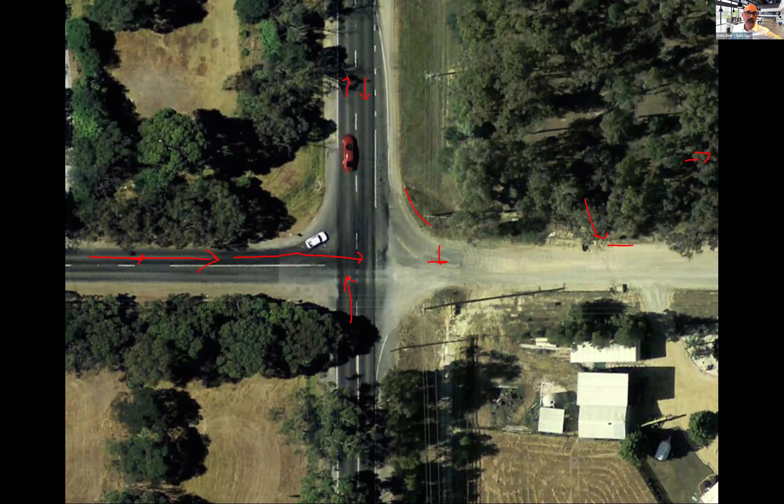So now, okay, let's just play this out a little bit more. What do you think you could have recommended as a road safety auditor to lessen this risk? What are some of the recommendations that you could make?

Staggering the intersection, prize for Chris Saunders there. Some warning signs, Amar, prize there. We had some more on warning signs, some more staggering the approach. Anthony, change the intersection form altogether, roundabout. So prize there for Anthony.

Now, 10 years later, so this is 10 years old, that is a roundabout. It cost a lot of our community their lives and serious injuries. Finally got to a roundabout, and there hasn't been any fatalities or serious injuries since.

We've got Rick with a hand up, I think. We'll see if Rick wants to actually chat to us, or that was maybe an accidental hand up.

I'm just looking. So audible pavement markings is a good one as well. So rumble strips across the road, advanced warning, different pavement markings, putting a median in. Tolini, I hope I pronounced that right. I think you're talking about a splitter island, and I really like splitter islands. So there's my little splitter island and my splitter island.

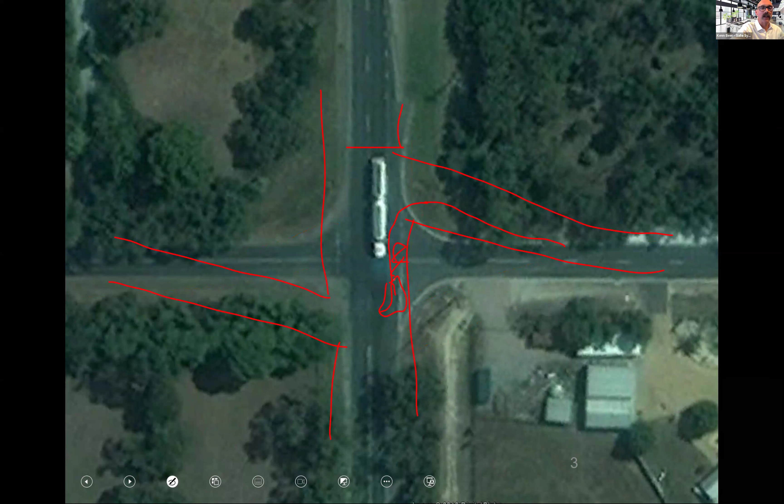And even if you give them a right turn bay, those times when there's a few of them, they start queuing in, and you just get this mess going on here. All right, and you get the same out of this side. So what you actually want to do, you stagger it the other way, so it's a distinct turn across traffic.

Now, those are all sort of supporting treatments, and anything associated with advanced warning up here, rumble strips to alert and everything like that, those are just supporting treatments, because we know we've still got high-speed vehicles here. We've given more warning. Vehicles will come in here, hopefully be better alert that there's an intersection, you've got to give way. But if mistakes still happen, for one reason or another, either overshoot or restart, we have this high-speed right-angle crash still there.

So this is where we go back to, I think it was Anthony who said that, you could look at changing the whole intersection form. A roundabout at this location would virtually eliminate death and serious injury for passenger vehicles. Now, this is not a highly pedestrianized area or bikes or everything like that, but certainly passenger vehicles, because as they approach, they would slow down.

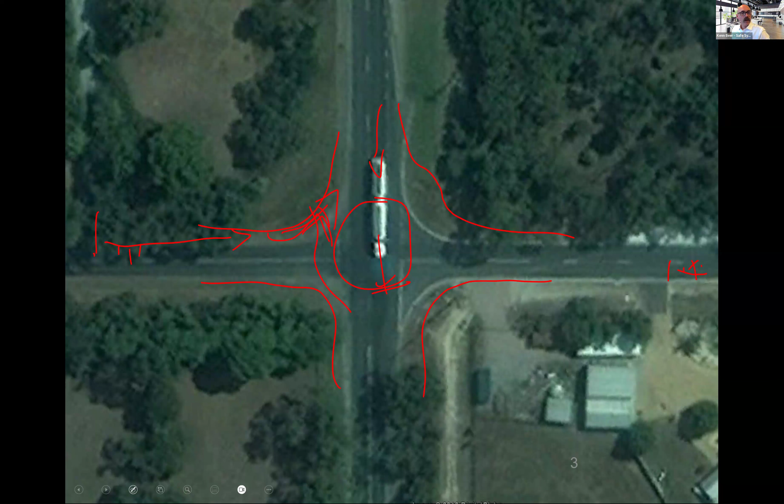They're very aware there's an intersection there. If they enter the intersection and then there's a crash, the angle of crash is just wonderful. Like, those vehicles sort of bounce off each other. Roundabouts, like, up in the 85 to 90% crash reduction factor for passenger vehicles. So there you go. A little example there.

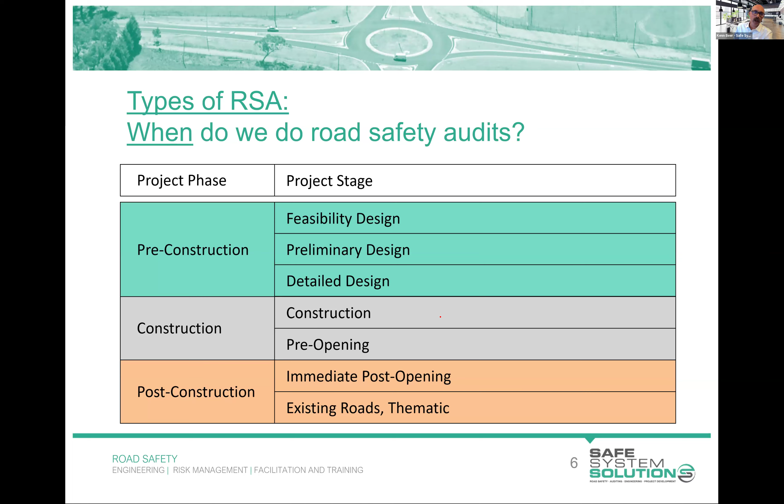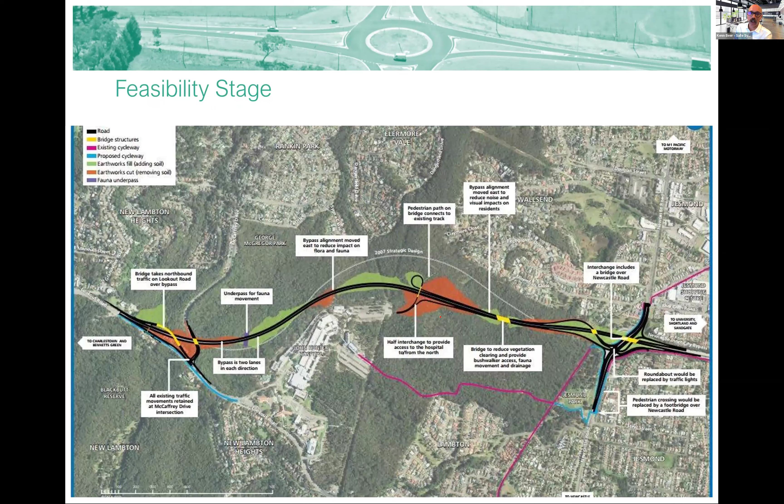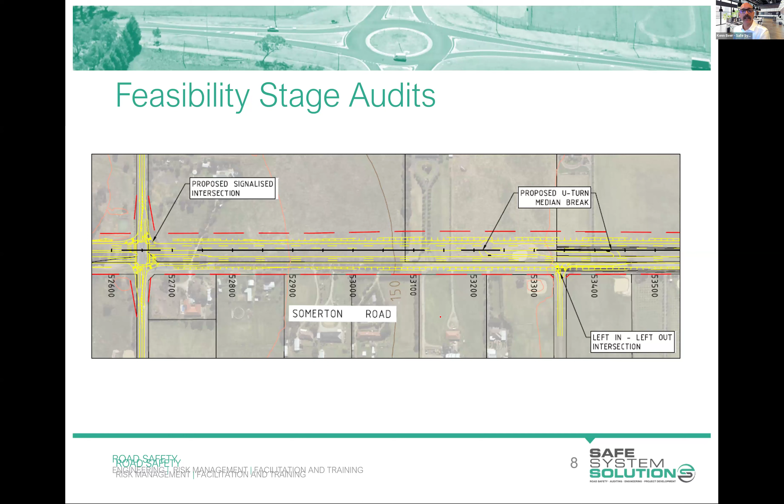So we talked about these big picture planning style road safety audits. The advantage of auditing at this stage is they're still very willing to make fundamental changes to the project, trying to ensure that the best safety outcome is achieved and all their other objectives as well. So there's real scope for getting significant change to happen. As you get more meat on the bone of the design and the project progresses, it starts to get a little harder to make change. You're still certainly able to make changes at these sort of stages.

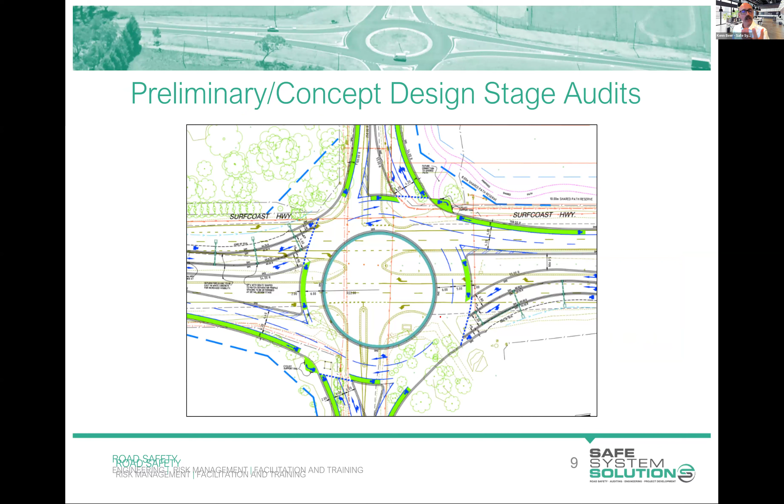And here they've probably arrived at what they're generally thinking as intersection form, roundabout. And then they're going to start to hone in on how do we make this the safest roundabout possible. You might still be in there to question the actual fundamental forms of the intersection and the project. But certainly as you get to detailed design, it's very, very hard to ever get fundamental changes to the project. Not to say that the road safety audit doesn't provide huge, important value, but it's really into the details of the project.

Have we got the geometric layout right? Have we got the super elevation right? Are we providing sight lines to the pavement at intersections, so forward sight distance, and is this all going to drain properly? Because that can be linked to road safety if we're going to get pooling of water on the carriageway.

Our job as road safety auditors is not to undertake a whole drainage assessment of the thing. But if you're concerned, "I don't think that'll drain that well and it'll pool on the carriageway," that's something you would flag. Technically, if you went, "All of the water now is going to go into that house on the side, that's going to flood that house," it's technically not our concern as road safety auditors.

Now, from a practical perspective, I would probably just note that somewhere in the audit and just say, hey, by the way, to note, this is going to have some serious flooding effects to that property, or is likely to. You should check that. But it's not a distinct road safety audit finding because it's not about death or serious injury or other injuries from a road collision, which is what we are there to focus on.

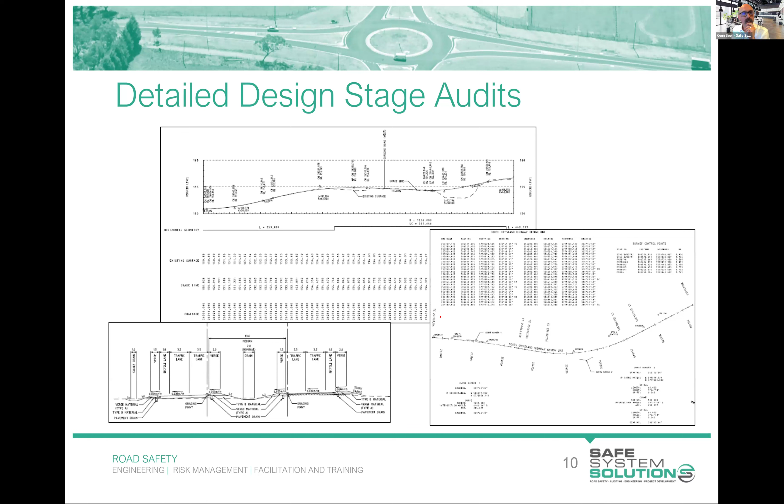Often we find that you've got that detailed design expert in the team, and then you've got somebody who's not, but asks some really logical, great questions. Asks, pedestrians at this point, they're not going to stop and wait. Or pedestrians over here, they're going to want to just go there. That's where they want to go. So is there a possibility of providing pedestrian crossings on that side as well?

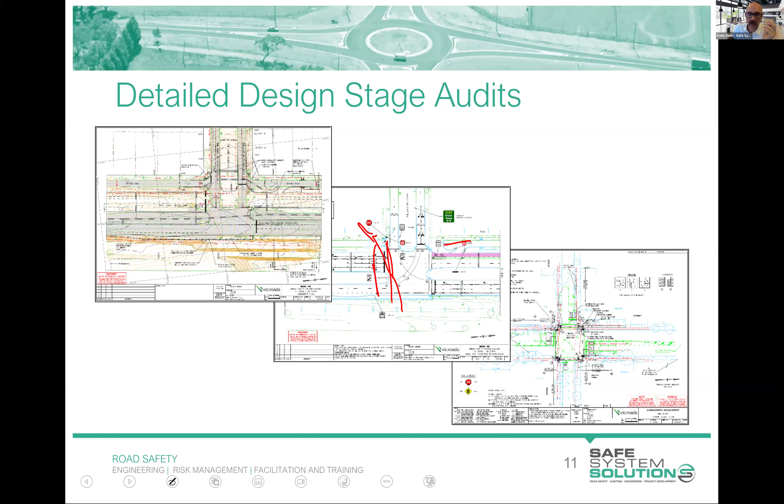Those sorts of questions, like how are road users actually going to use this? What are they going to perceive? What could be confused? And combining that with the understanding of the geometric layout and how all the signal phasing will work and everything like that can be quite a nice combination.

Just one example of the specific detail you start picking up in these detailed design road safety audits. I picked just one out of thousands I could have picked, but I like this one because I had a few good photos. Drivable culvert end walls. Now we've got an end wall, or a head wall, as it's called, which is where you're taking the water under a driveway, an access point, or crossover. The old practice would be to just put that head wall, and we saw lots of death and serious injuries involving vehicles leaving the road, abruptly stopping when they hit that.

And so there was the development of what we call drivable culvert end walls, which, okay, don't stop the vehicle in a nice controlled manner, but at least make sure that the vehicle's not having that abrupt stop at that location. So a vehicle will go up on that. Now, we do drain our water sometimes across the road. And so this time we've got it going across. So this is a drivable culvert end wall.

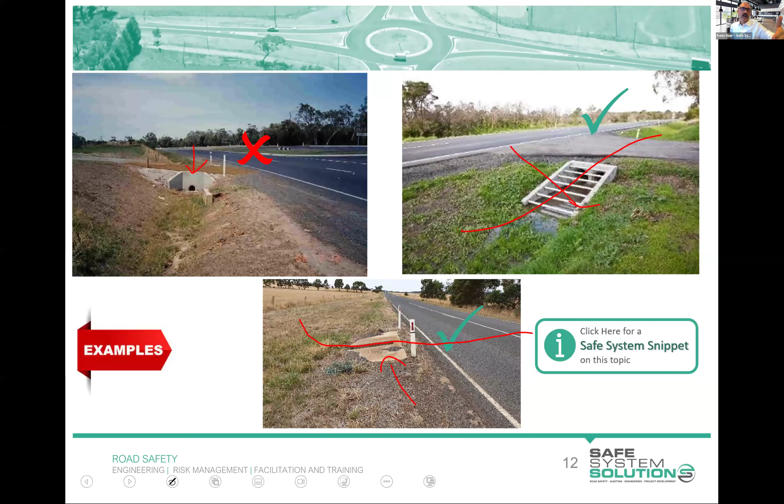But there's two types of drivable culvert end wall: a type 1 and a type 2. Ensuring that type 1s and type 2s are correctly specified in the design is important, because if you put this one running parallel, there's a possibility of dropping in it. I think it'll actually work out generally okay, although some of these have much wider gaps, and vice versa. You can see the precision of detail.

That one we see pop up quite a bit, because often people just copy, or they just talk about type 1. Sometimes they don't even know there's a type 2. And so it's type 1, type 1, type 1. And it just happens that actually that one goes across the road and we need the type 2.

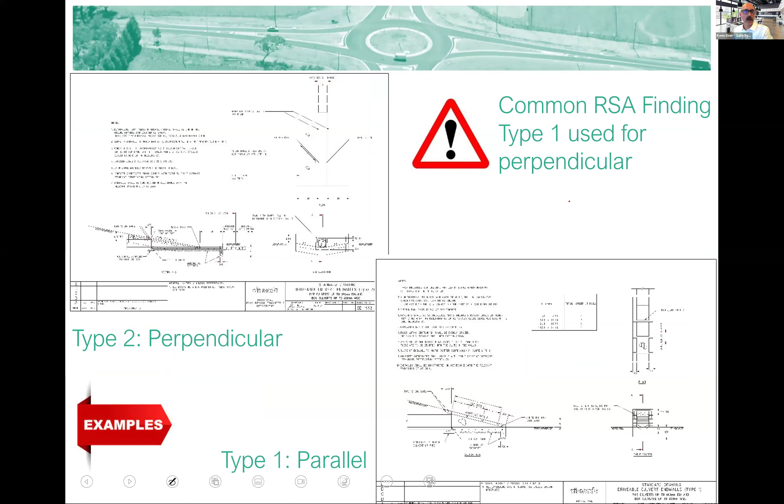And we talked about our construction sites, traffic management, thinking not just about conformance with the code - are the bollard spacings correct, is the taper long enough? All important stuff. But think bigger, think wider, think road users - how are they going to move around here? What's the tie-in, what's the lead-in?

What happens when the traffic banks up? How are bikes going to get through here? How are pedestrians going to get through here? What happens when they close this for a long time, or a couple of minutes, and traffic really banks up? Where does that go? Are people just going to avoid this, divert down other roads that are more dangerous?

You sometimes do this on really big schemes too, like major freeway works, and you're thinking about all sorts of challenges, and also how does it interact with electronic lane use management systems - which one should be shut down, where and how, and what are the configurations of that? So there's a bit of intense thinking to be done with it.

But one thing I always flag is that if you're doing a small job, like some patching, using a standard roadworks layout, I'd say it's overkill to do a full-blown road safety audit. That's something the surveillance officer, the project engineer, and the traffic management company combined should have enough to ensure that's done safely. Should it be great if we had road safety audits on all of them? But that's just a huge effort for a very small project.

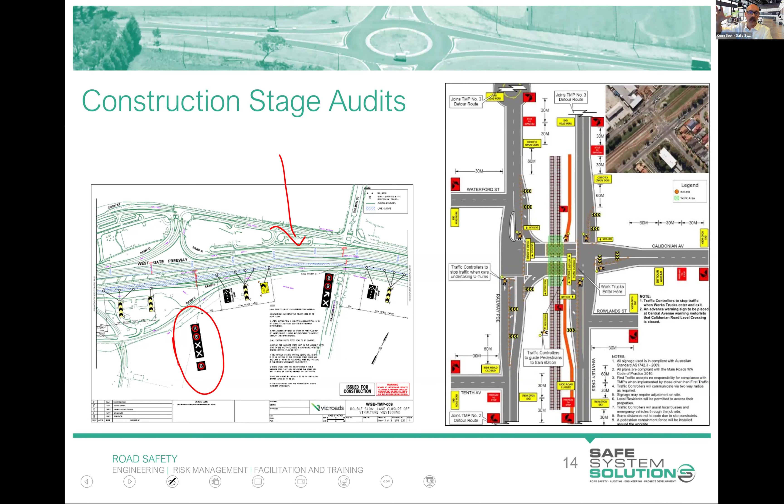And we talked about pre-opening, where you're going and doing that last minute check. And I showed this fun little one - one of my colleagues was doing the...

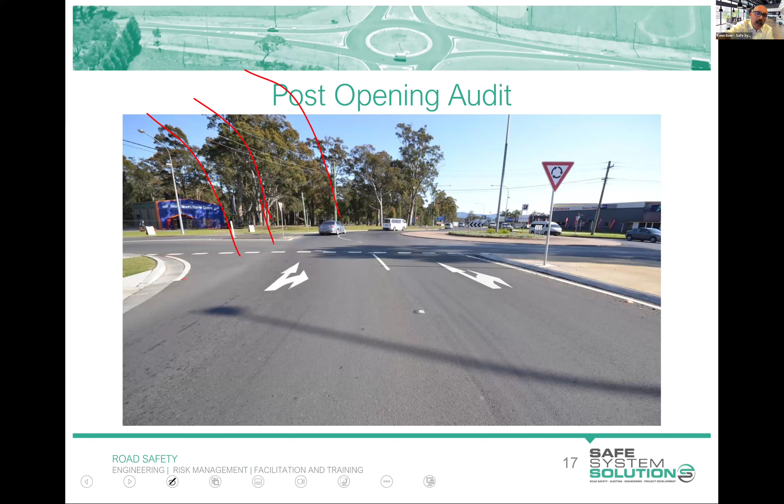Pre-opening road safety audit with a team at the Peninsula Link just before they were opening up, and they had marked this essentially not on a roundabout but on the exit. There's a dual exit, two lanes exiting, and they had marked one to go like that, which was correct, but they also marked the one next to it to go the same way. They just used the same marking, which obviously then causes that same issue.

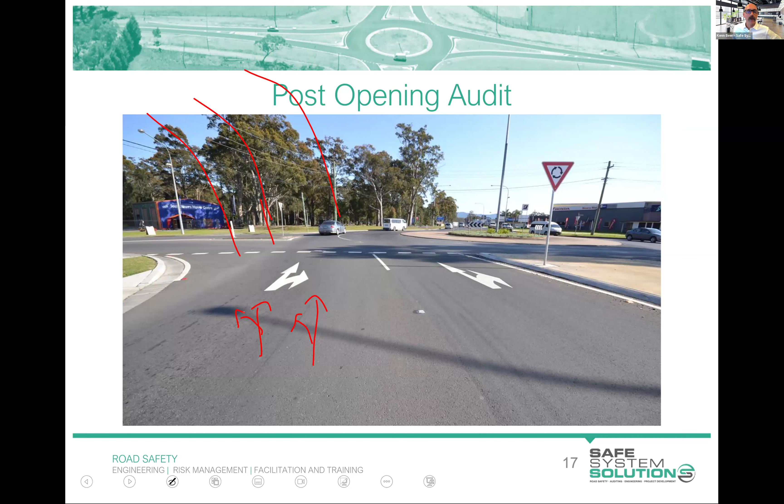So you've never seen line markers work quicker in their life to get that fixed. The minister was coming the next day to cut the ribbon, so everything was happening. But those things happen, even on a multi-billion-dollar or billion-dollar project. And existing conditions audits...

Before I finish on existing conditions audits, I'm going to give you a little warning. If you're a local government or road authority representative and you think, well, these audits sound really good, they've got a great benefit cost ratio, we should be looking at doing audits more - I just warn you, don't get caught into the trap of saying we will undertake road safety audits on all of our roads over the next 5 years.

All you will get is thousands and thousands of issues. There's some merit to that, but you'll never be able to afford to work your way through all of that. Instead, use a way to filter that down to some really key roads that you've got concerns with, then deploy the road safety auditors to give you details and ideas.

One other place I really like an existing conditions audit - I used to use this when I was managing different areas at VicRoads - was where you had stakeholders who were really irate about a safety issue, and there was disagreement between the road authority and the stakeholders. Either they were determined this was the most dangerous location ever, and we thought, well, actually it's not, we've got other priorities and we think it's not as bad, or vice versa.

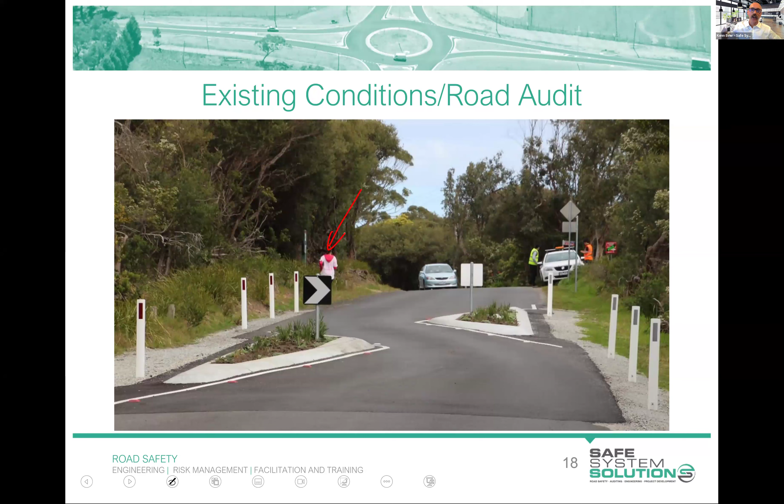This was a local government who installed these one-way slow points, and the community was jumping up and down saying this is the most dangerous thing - we don't know who's meant to go first. But that's the whole purpose of a one-way slow point: only one car can fit through, forcing them to slow down and work it out. I was on a team that looked at it, and we didn't find any high risk issues. We were more concerned with things like pedestrians along the road, and at night we didn't think it was quite lit up enough.

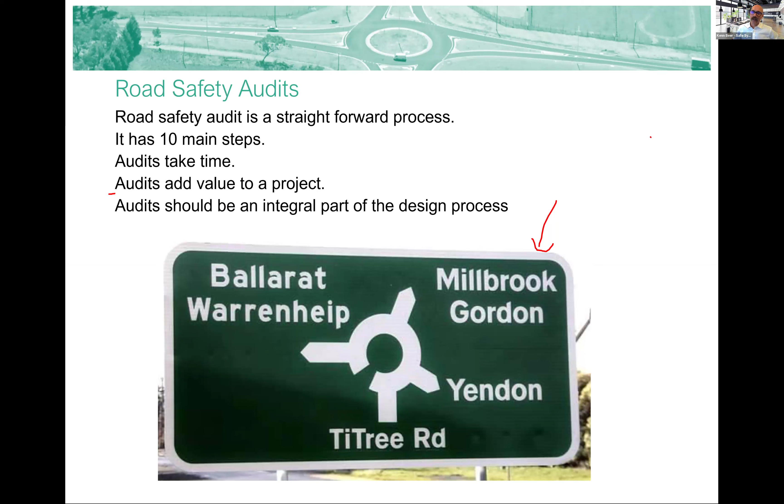Ooh, we had some interesting comments here, didn't we? It's in Victoria - well, that's true. Wrong way around the roundabout. Mason has come through, I like that. And Anthony's clarifying exactly why that is. Well, I'll come back to that, and Mason gets a prize. But let's come back to that - I promise I will come back to that comment from Mason. Let me go through the 10 steps first, and then we'll get back to that.

So the first thing is that the audit team needs to be selected, and that is the responsibility of what I'm going to call a client. In the Austroads guide, the most recent one, it was referred to as a project sponsor, because that gives a better definition of who actually holds the responsibility for the selection of the road safety audit. What I mean by that is, if a developer is coming to do work and they have to access onto the arterial road network, the client - the actual engagement of the audit team - is most likely done by the developer.

That's because the road authority, who is actually the project sponsor or end client, has delegated that authority to the developer through the planning process. So project sponsor is the term often used, but the ultimate responsibility for selecting the audit team lies with whoever will manage the asset after it's built and handed over to the long-term asset manager. That's usually local government, the state road authority, or territory road authority.

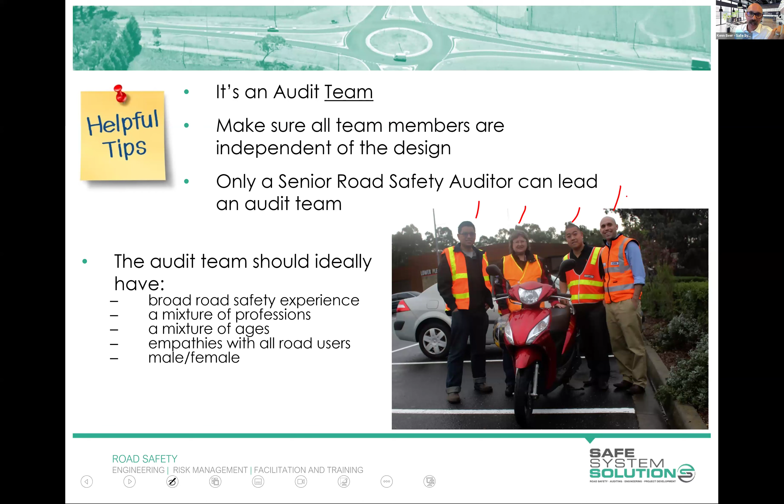Here's an audit team I put together - it's actually for a motorcycle specific audit. Me, Michael, Johan - we're all about the same age, male, engineers, worked in the road authority together. We kind of see things about the same, we're not really providing any unique ideas there. So we asked Wendy to come along as our rider with a different set of eyes, not an engineer, older than us, female perspective - just injected different things in there, which sometimes we scratched our head at, but at least we were then thinking about those, weren't we?

So you get all the background information. I talked about the commencement meeting, looking at the documents, and then you get out there and you undertake the inspections - you do a daytime and nighttime inspection.

Oh, it's Wally. Anybody who's not concentrating, wake up. Wally has arrived. Count your Wallies.

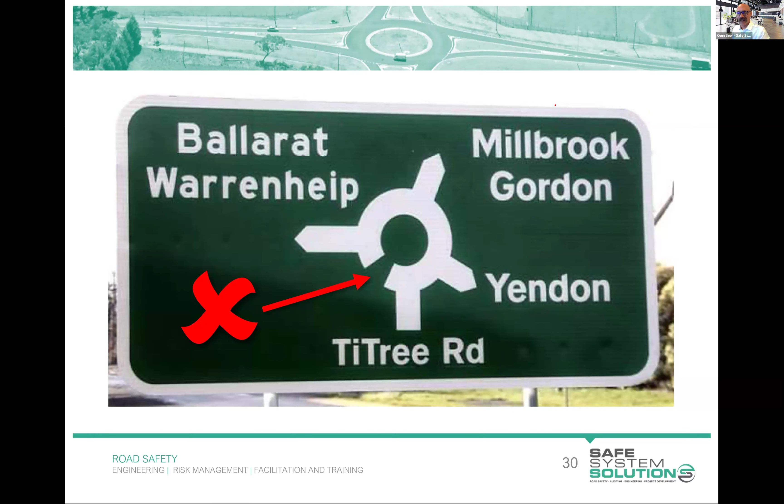So over to you. Where do you think - Rick's already answered my question, I didn't even ask it. Yeah, I like this group. Where do we think it's going to be a higher risk? And yes, tourist areas - prize to Rick for that. He's got that issue. Where are you based, Rick? Type that in.

Beauty of this stuff is that they get fixed. That's not an issue. Okay.

Let's go with what is in a road safety audit report. Well, we want to describe the project and the stage of audit you're doing, and list the information provided. Okay.

Important one here, and this will cover yourself if you ever find yourself in court as a road safety auditor, because what happens is you are given a certain set of information at a certain point in time in a project. You're given a design at this point in time, then you're going to make a whole lot of comments on it, recommendations, and it's going to evolve. They're going to change things, do this and that. If issues pop up along their design journey, they'll alter stuff, and something will be built. If something that's built has issues and a crash should happen, and there's legal issues and they decide to drag the audit team in, you really want to know what you looked at, and you want to be really clear about what you looked at. So actually putting this design number, this date of design, clearly in your audit is very good practice.

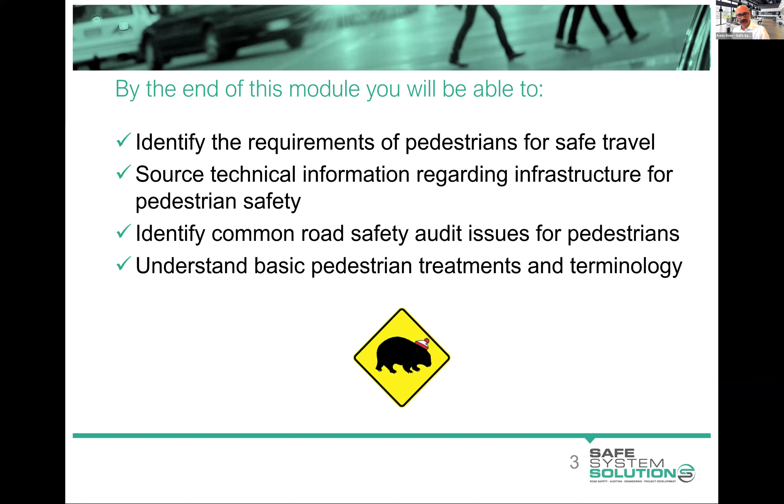Good, thank you. Wally is back.

Okay, four sort of groups or categories of pedestrians at greatest risk. Let's go. Put them in the chat, win a prize. What do you think they are? Four groups of pedestrians at the greatest risk. Okay. Children, elderly, disabled. Okay, we've got three of them. So, Marissa, you're going to have your work cut out for you, working out who you're giving prizes to there.

Youth on phones. I like that. That's not one of the ones we have, but I don't think the research has been done enough in modern day times to understand that specific risk. And we know it is a risk. Well, it's not just youth on their phone; it's everybody on their phone. Let's give Diana a prize there just for making us think.

Hassan's got it. The intoxicated. Intoxicated is actually our highest risk pedestrian group. So elderly, young, disabled, and intoxicated. So elderly and young are overrepresented in death and serious injury of pedestrians for similar but different reasons. And I think it's pretty obvious to you.

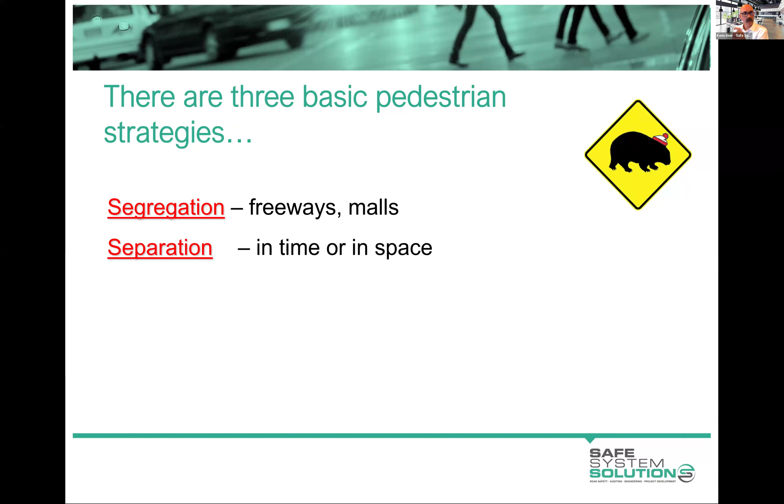Now, the basic pedestrian strategies, and Marissa, I'll check any questions after this slide. So we can segregate, which is essentially to say, pedestrians, you're here, and vehicles, you're over here. You don't get to mix. Freeways, malls, those sorts of features. Separation, and we can do that in time or space. I've got a couple of slides on this. Or integration, which is where you're intentionally mixing modes and getting them to share the road or street.

So segregation, yeah, freeway is the obvious one. We are doing everything we can to not have pedestrians on the freeway. If you actually undertake investigations into death and serious injury on freeways, you find pedestrians appear quite a bit, either getting out of their vehicles or for some reason wandering on there, and you've got high speed and high volume and serious outcomes, but we're trying everything we can to not get them on there.

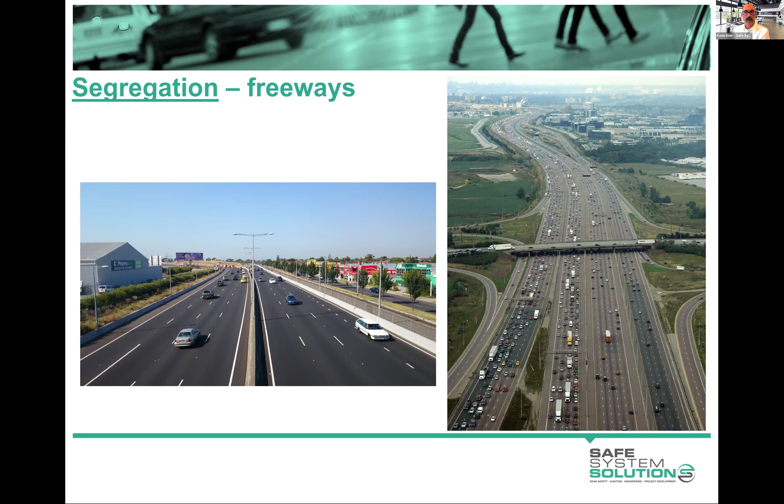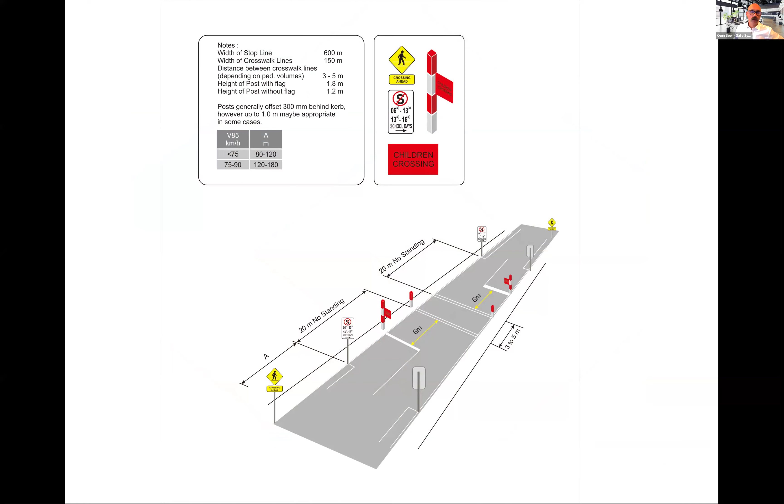And malls, of course, we're trying to not have any vehicles there, and occasionally you might have a service vehicle or something, but it's a very rare event. Separation in time is really that one bit of road space or street space is used by pedestrians solely at one point in time, and then by vehicles at another. So pedestrian crossings, classic example, or school crossings, or these types of crossings.

It's called a Barnes dance, but most people just call it a scramble crossing. Marissa, prize for scramble crossing, and fill me in. Did I miss any questions there, Marissa? Barnes dance, that's an interesting one, isn't it?

It is. I assume Mr. or Mrs. Barnes came up with the idea back in the day and claimed it. It's usually the way they all get their names.

Okay, no, there was no question. There was just an observation by Vuk that tourist areas are higher risk also. Pedestrians unfamiliar with the surroundings, bright lights, and often intoxicated in some areas, where he particularly said Surfers Paradise, where he hates driving. Yes. Yeah, really good points. Factoring some of that into your risk ratings and your thinking is good.

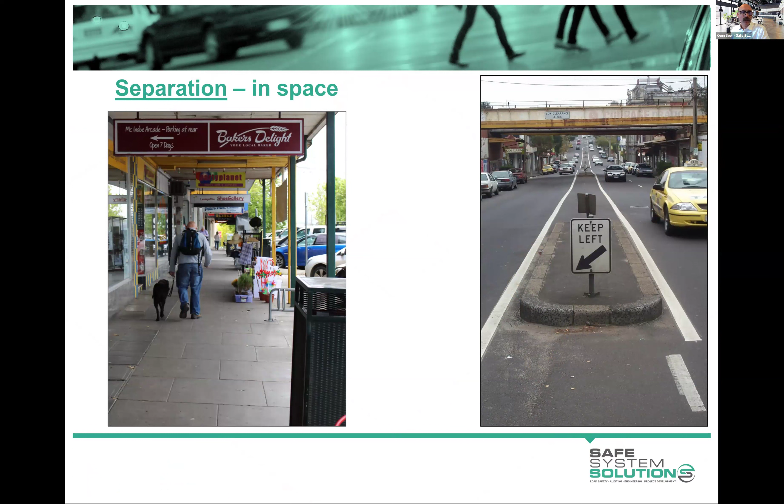Okay, separation in space is, well, it's in the road reserve essentially, but you've got footpaths or refuge islands or these areas where you provide those spaces for pedestrians crossing or to travel. Now, as a road safety auditor, I know that I can get technical information about the width of refuge islands and these sort of things, what they should be under the standard. And I'll use that as a bit of an indication, but I'm not going to be 100% driven by that. Like, oh, meets the standard, I'm not worried.

If I see it's an area with high pedestrian activity and there's going to be obviously more than one or two pedestrians in there, well, that might factor into it. I'd be thinking about, can a father or a mother pushing a pram safely be here? Somebody on a bike stopped there, is that going to be safe? Those things are usually factored into your jurisdictional standards on what the width is, but you need to be out there and do it on a case-by-case basis and see who's using it, what road users, how are they using it, how many of them are there, what are the other challenges?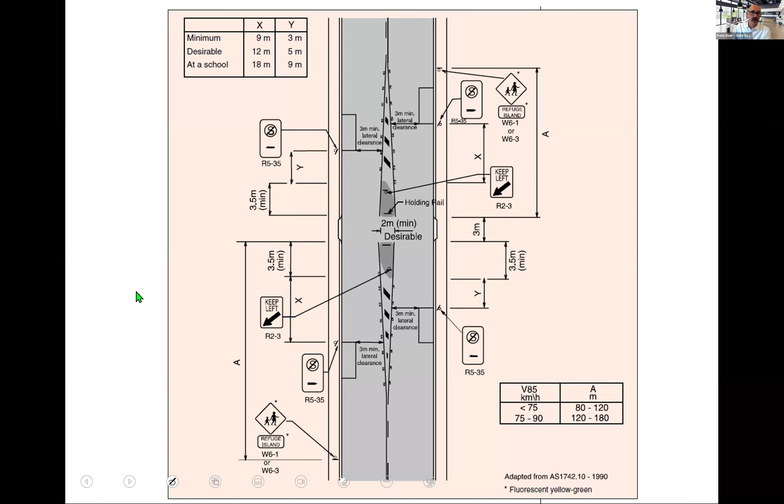Chris brings up a good point. We've got so many different modes out there. We've got cargo bikes, mobility gophers, wheelchairs, scooters. We're dealing with a lot of different things, and we just factor that in our thinking. Some people will often see a pedestrian overpass as the ultimate solution for pedestrians, and I just want to flag that we as road safety auditors need to be realistic in the expectations of, will people actually use this facility that's being built?

Now, is that a regulatory sign in Australia? Is that a sign that we actually use? So while people ponder, is that an actual sign? Rowan's asking a question around liability, and that's a very complex question. As a road safety auditor, following your correct practices and producing an advice piece, you've shifted liability really back onto the receiver of that report and their decision making. It's pretty rare for auditors to be sued individually or as a team for their specific advice.

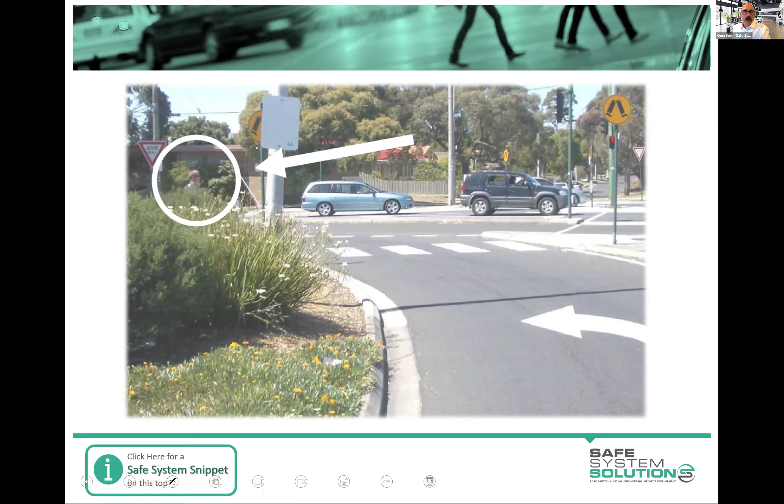And talking about larger vehicles getting around curves, we've seen a bit of a spate in recent times of larger vehicles tracking over pedestrians waiting at signalized pedestrian crossing points and killing the pedestrians waiting there. Now, those pedestrians are, the CCTV on some of these, they're on their phone, as we all are, usually standing, waiting for the lights to change. And then a large vehicle just can't make the turn and tracks over.

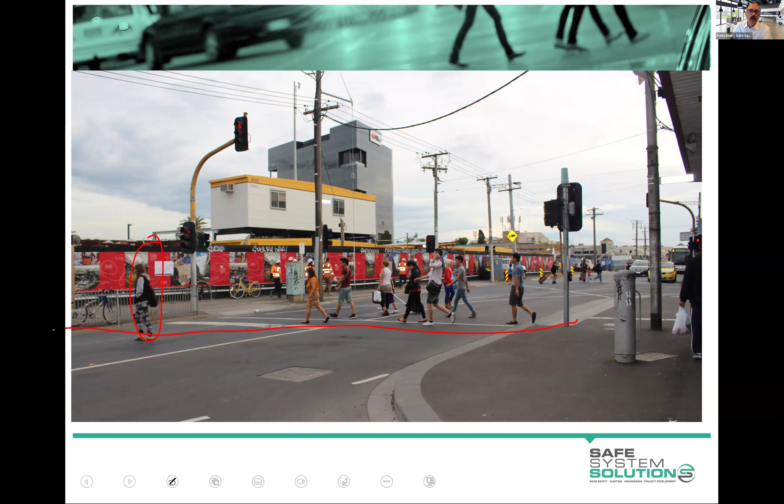So it can be used in specific locations, very well thought through. Two of my favorite places to use pedestrian fencing: one is outside pubs or bars or any drinking establishment or nightclubs. I've done two coronial investigations into deaths that have occurred outside pubs and bars where patrons have come out straight onto the road and been killed. One was two gentlemen fighting and being pushed out onto the road out of the establishment. The other, very unclear, someone fell onto the road straight out of the pub. So essentially the pedestrian fencing in those locations is not to corral pedestrians, it's to contain. Another spot is outside school gates - it's really a containment to stop them playing and going onto the road. Very targeted use to actually direct pedestrians where to cross can be effective, but just always be aware that it can backfire on you in a big way.

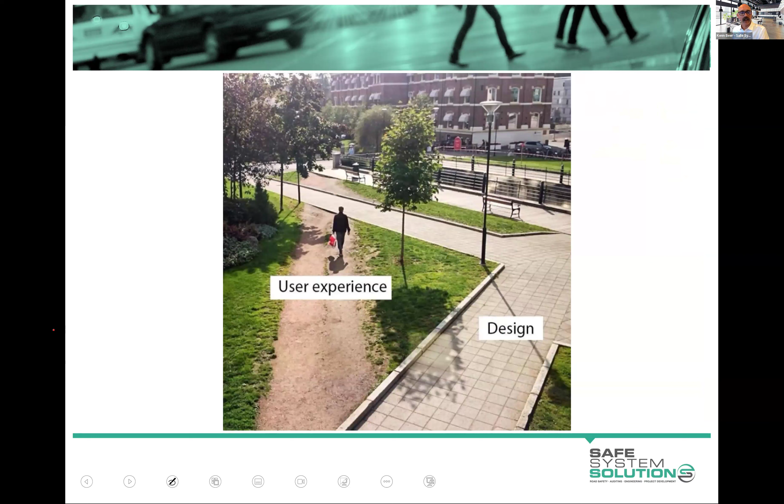I saw this on LinkedIn and I thought it was a good explanation of pedestrian desire line, thought I'd chuck it in there - lots of photos of pedestrian desire lines, you can see it often. I was talking to somebody, I think it was City of Greater Geelong, and they said sometimes with new parks, we put them in and then we don't put the paths in. We let it just run for a while and see where the goat tracks appear, and then we put our paths there. I'm like, that's awesome - that's just user-centric design, perfectly.

If you segregate a community with roads, this doesn't happen a lot in Australia anymore. If we segregate a community, they will still cross. They need that movement. So in those early feasibility stages of audits, you really want to think about that. If big new roads are planned, you've got to think about where pedestrians need to go, and they will go, so we need to provide those facilities.

Let's have a look at a couple of other case studies, and then I'll give you a little challenge before I let you go. There was a serious incident involving a pedestrian, and this is what the driver sees looking up here along the road. The next photo is taken just behind this hazard board marker. So let's jump to there. That's what the pedestrians see.

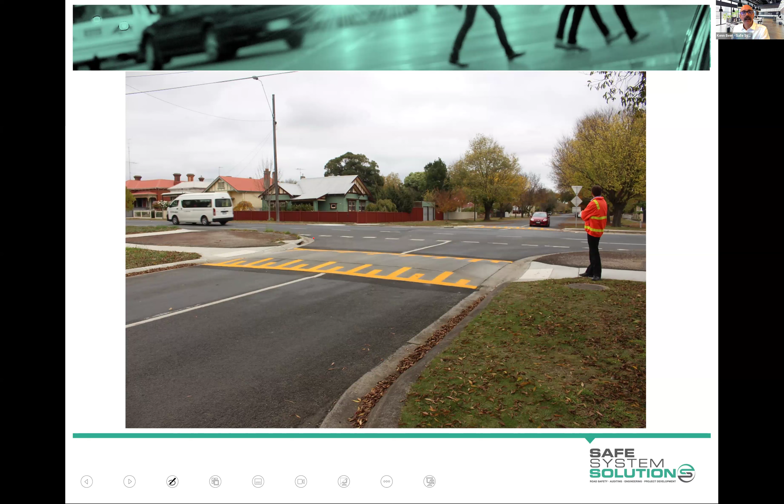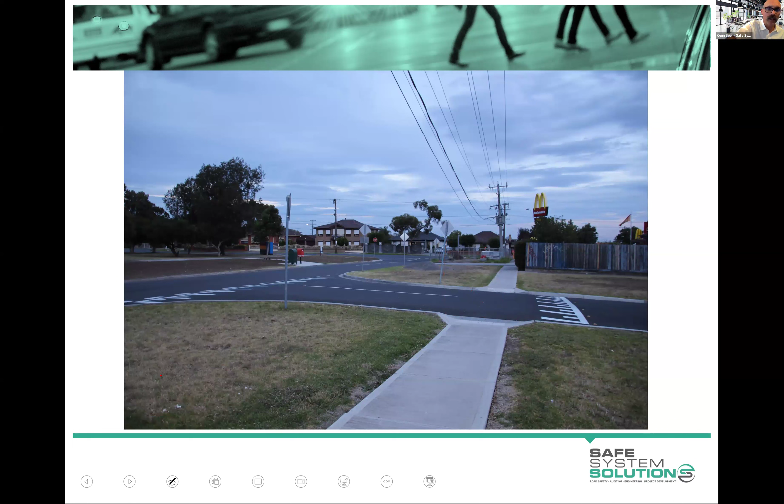But anyway, that aside, we can be clearer on it. Now, I think this is a good example of a threshold treatment that still is clear that this is a road, right? I'm not saying that's a choice to be made. This could be absolute pedestrian priority with the correct zebra crossing markings and correct signage. But if it's not, be clear. So a pedestrian walking up there, as this one is, sees that's a road. I'm approaching a road. Oh, look.

Good old airports. Anybody know where this airport is, actually? Oh gee, I'll give a prize for that. But airports are just a treasure trove of road safety audit findings. Oh, it is Launceston, well done. Good old Lonnie Airport.

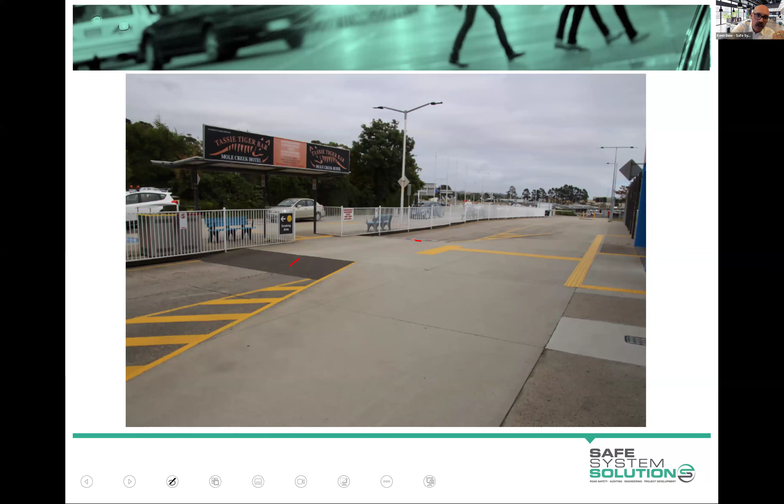You get off there, and then there's this sort of - is it pedestrian priority? Is it vehicle priority? It's actually vehicle priority through here. Okay, the raised nature of this is going to certainly lessen risk, but surely that could have just been made pedestrian priority, couldn't it? Courtesy crossings is what the general name for this is, which is trying to warn drivers that pedestrians could be crossing at these locations and slow them down a bit. I like the raised nature of it, but let's not try to confuse people.

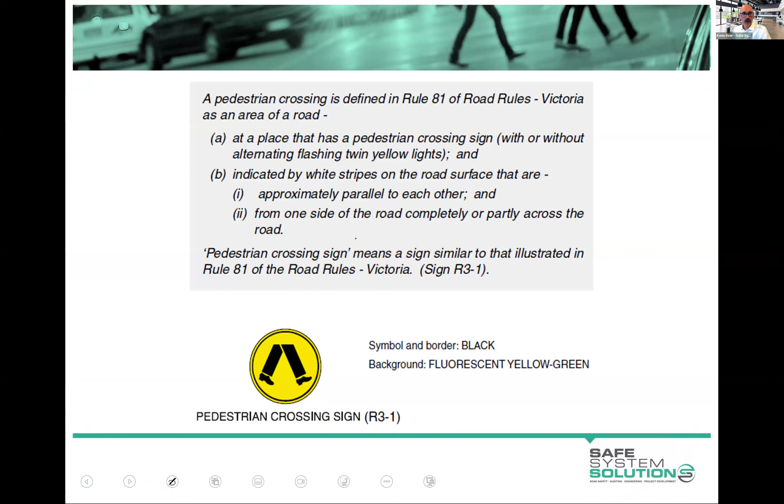Let's just be clear on that priority. Put the pedestrian legs in, put the line marking. This one needs line marking as well. Just make it clear.

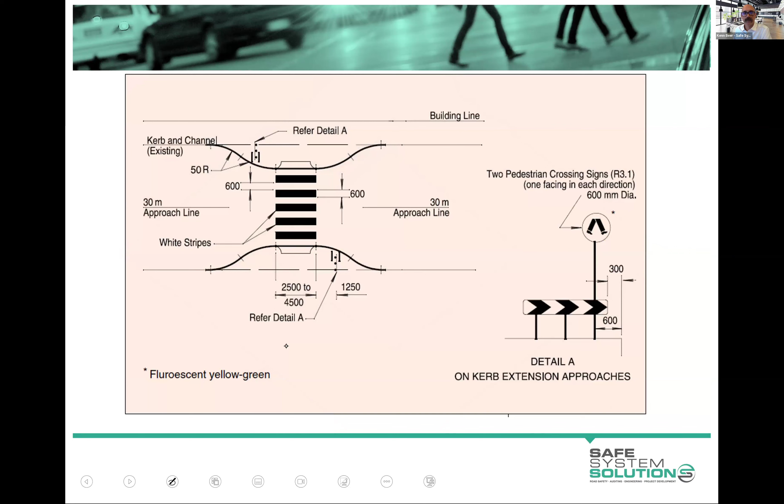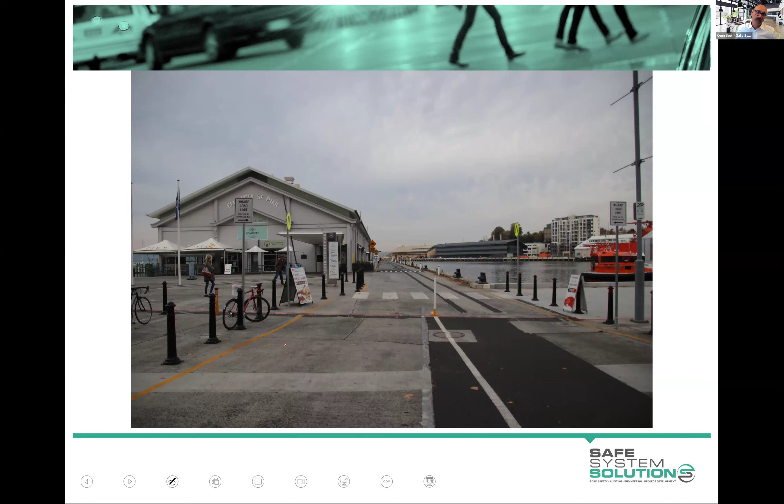Okay, here's a crossing down Ricks Way, actually - it's not actually Rickstown, it's... Port Campbell. But don't worry about these bits, let's just have a look at the crossing. It's the next town over, or a few towns over.

If you got this as the design before they built this pedestrian crossing, apart from maybe wanting to make it a raised crossing, what small tweaks to the design do you think you could do that would improve or lessen the risk of this crossing? I don't think it's high risk, but what could you do to improve it - small tweaks.

Okay, so we've got people wanting to do kerb outstands - move it out a little bit. It sort of does have kerb outstands as it is, but could we do that? People want to raise it. People have got some interest in the shrubs covering the signs. These are all great things to look at.

Yeah, Anthony and Rick are sort of looking at one that I had an interest in, although I do like everything that is coming in. Some people are still determined to talk about these lines on the road surface, which they're just trying to activate the street a bit - I'm not highly concerned about it, but maybe as an auditor, when you got out there and had a look, you thought, is it confusing? All these sorts of things.

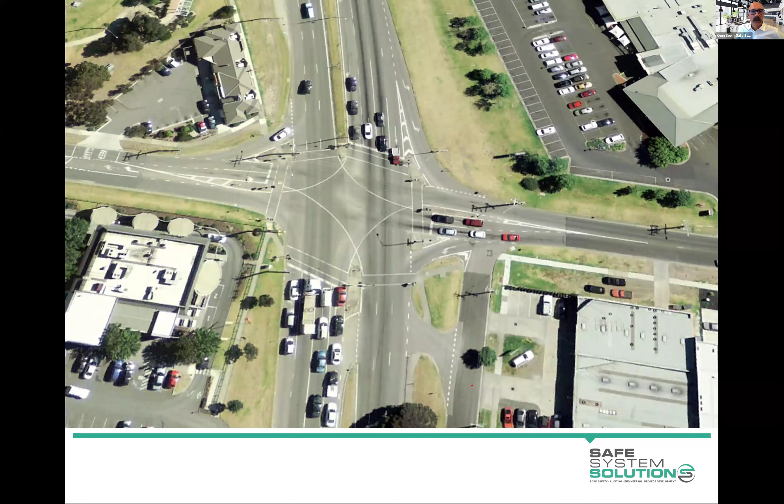Quiz time. So here are our options, and I'll talk them through, then the box will pop up on your screen. Crash number 1: in crash diagram notation, we always use a dotted line for a pedestrian and a solid line for a vehicle - here the vehicle is turning onto the pedestrian. That's number 1 in this location. Number 2, again the vehicle turning onto the pedestrian. Number 3, the pedestrian walking out and the vehicle in the slip lane. Number 4, same but with a slightly different geometric configuration.

And number 5 is a vehicle turning through the keep clear and a pedestrian walking along the footpath. So what you're going to have to do is think about which one of these is the spot where all these crashes have happened. They all have a certain degree of pedestrian risk, but which one comes out as the highest in your mind?

Marissa, let's pop that poll up if you can. There it is - you can move the poll around on your screen so you can look. And remember, you're not being marked on this - this is just for you to have a go and a guess and think about it. Then we'll reveal the answer and see how we're going. I'll give you 30 seconds on that.

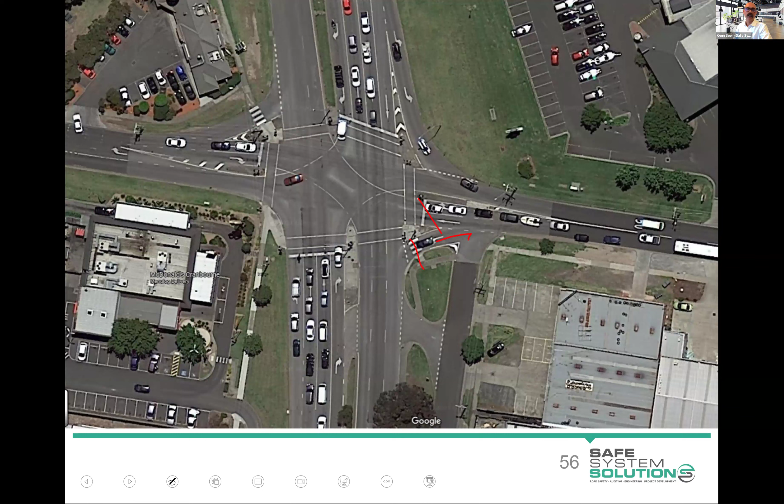So, this one's played out with the crashes, and there you go. It's again a reactive fix to make it so the pedestrian crossing goes into the little island, and then there's the crossing. It's still not ideal, as we talked about, the vehicles still looking up that way, but at least in this sense it's sort of configured in that particular arrangement.

Now, as a road safety auditor, I systematically go through a design. So imagine this is a design, they're building this new intersection, they've got some constraints with services and other challenges, and so this is how they've decided they're going to do it.

Well, I'd kind of start myself here in all these scenarios. Maybe I'd start myself further back. This is in my mind, right? And I go, okay, I'm a driver. I'm in my car and I'm approaching this intersection and I want to turn right. And I ask myself questions. Okay, am I going to be able to see where I need to go? Is it clear? Yeah, I'm going to get up there. Okay, I've got a right turn bay.

Is that just right turn? Can I see the signals? Okay, now I'm making my turn. Okay, what if I go too fast here? Where am I going to go? Okay, I'll leave the road here. Are these vehicles going to be able to see me? All right, and I ask myself lots of questions like that.

Then I come back here and I go, okay, I'm a driver again. I want to go straight. So I'm going, okay, I'm going straight up here. Is it clear which lane I'm meant to be in? Can I see the signals? Do these lanes line up? Is there any confusion there? No, okay, all good. Now, and then I go, all right, now I want to go left.

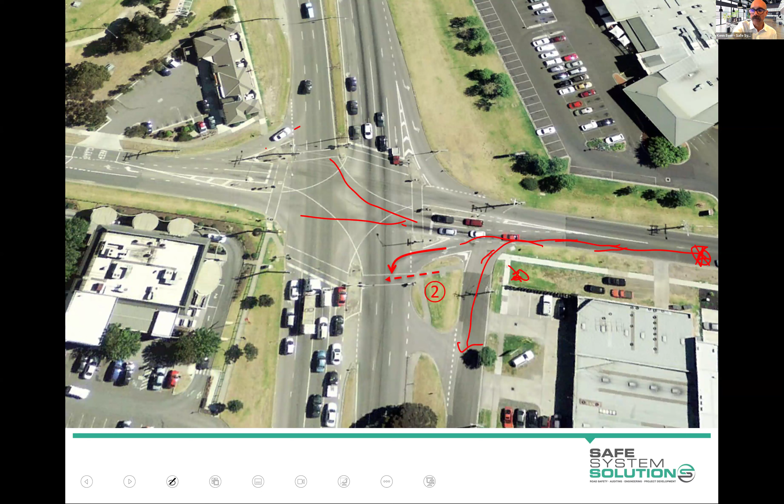So I'm coming up here and I go, oh, hang on, do I turn into this one or what's going on here? And then I'd flag that in my mind. I'd go, that's something weird going on there. And then I'd go, okay, I went down that one. Where do I go? And then I go, okay, if I go into this one, what happens here? Okay, I'm going to look up there and I'm turning. Oh, why am I going onto a pedestrian area? And hopefully I would have flagged that at that point.

So, for those who said that one, I can see why you did. You've probably done exactly what I did in my mind and gone, well, that's weird. What's going on there? Why are we turning in there? And then you do that for all road users in all directions, in all movements. There's a lot of systematic thinking, isn't there? Because you do it with a bike too, you're coming this way, you want to turn right, you want to turn left, you want to go straight. You're a pedestrian, you want to go from McDonald's over here to the pub, or probably vice versa, isn't it? Go to the pub then to Macca's. And these sorts of things, you're moving all this around in your mind and looking for issues.

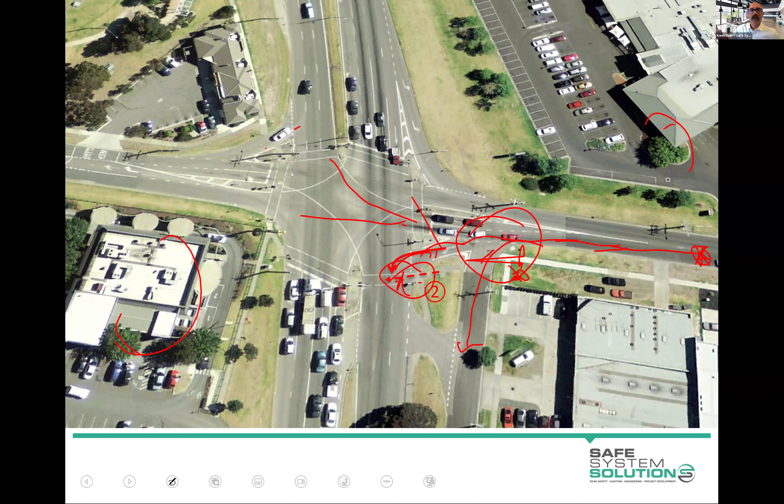It is kind of like modeling every movement in your mind. And when you're systematically doing it, as I say, audits can take a while, but you can move through that in a reasonable fashion and cover off all those road users.

When we undertake road safety audits, we want to ensure we're out there at times of day where there's particular activity. Obvious: schools. If you're undertaking a road safety audit and there's schools in the area, you've got to get out there, school drop-off, school pick-up, see how it operates, see all the chaos, understand that. If it's the local footy ground near that, try and get it on a home game, see how it operates. Okay, practically, you may not be able to actually do that within the scope of what you've got, but if you can, get out there for those times.

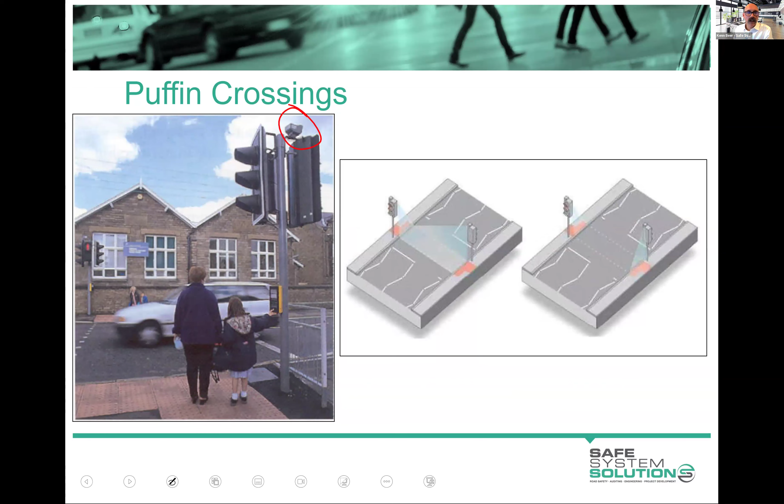And our trivia started off with some pedestrian crossing features, so puffin crossings, the pedestrian user-friendly intelligent crossings. So that's the little thing up there that you can add to pedestrian crossings, which is when you walk up to your house at night or someone's house and the lights automatically go on, well, it's the same technology. It just holds the light red while any movement is on the crossing. So if pedestrians are lagging or slow or the like, it just keeps cars held. Somebody went on a bird theme when they started coming up with pedestrian crossing facilities, and everybody stuck to it. And so that's puffin crossings.

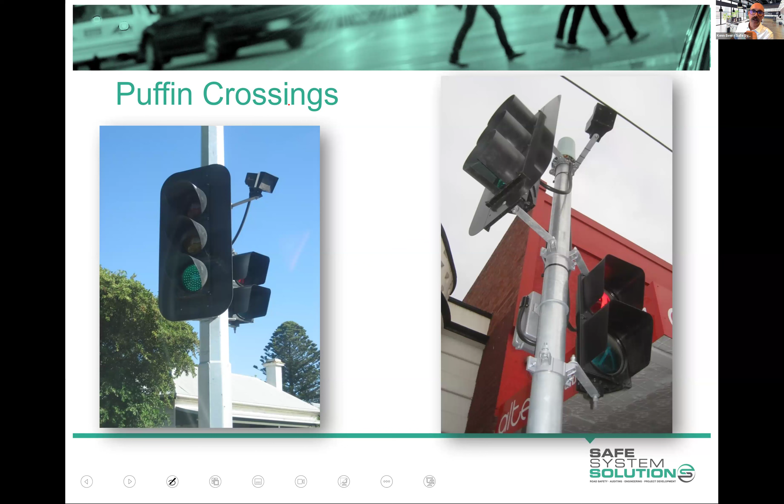Toucan crossings. Well, toucan is almost like just a conformance with the road rules, because it's saying that two can cross, pedestrians and cyclists. So cyclists can ride over the crossing. Really, to me, it doesn't make any difference in road safety, because bike riders just ride over pedestrian crossings anyway, even if there's not the symbol. But it's a legal conformance thing. Two can cross. I'm not making up these ones.

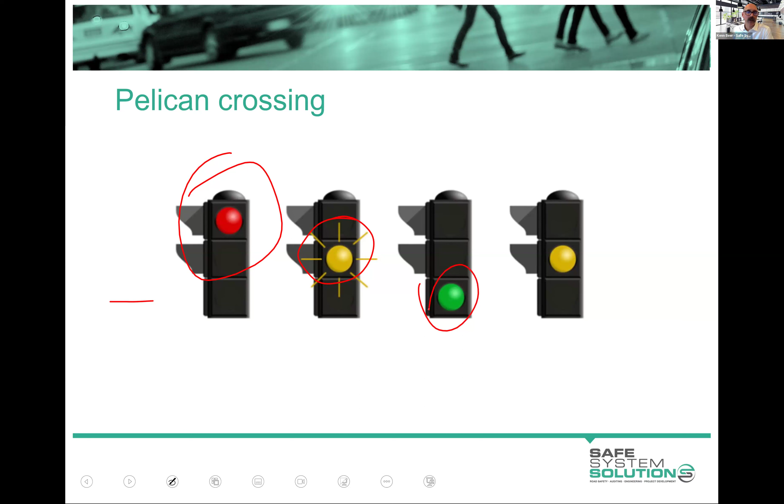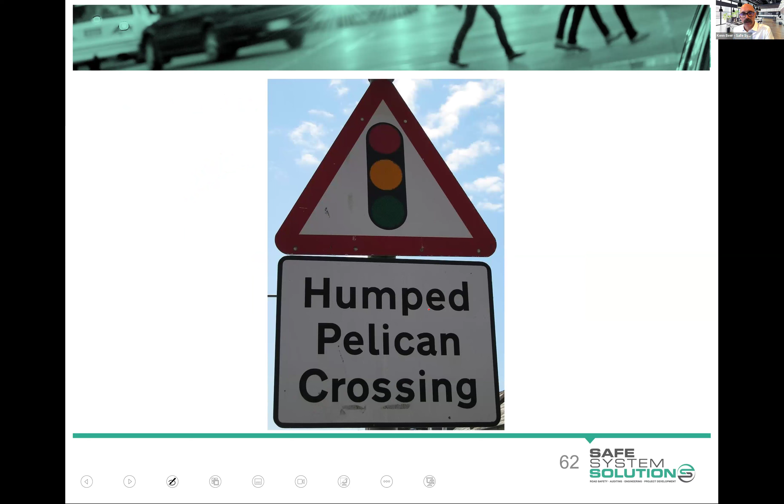Pelican crossing, that's a pedestrian light controlled crossing. So it goes from a red light, this is what the driver sees, the pedestrians are walking. Then it goes to the flashing amber, flashes for a while. And that's just, again, to provide warning if anybody's struggling, somebody's slow to cross the crossing or the like. Then it goes to green. That's a pelican. Pedestrian light controlled crossing is what it sort of stands for. That was a UK one, like in the world's top 10 funniest road signs or something. It makes complete sense to me, but anyway.

Pegasus crossings, that is horses, crossing for horses. Again, this is a road rule configured one, because technically a horse is a vehicle and you can't ride your horse over the crossing.

I think we're getting a little... Actually, Marissa, and I've told you this one before, but I'll tell everybody that, did you know it is illegal to ride a horse when you're intoxicated? Because that's drink driving. I know now, because you've told me before. And I also told you that it is not illegal to ride an intoxicated horse. Go figure. Yeah, as long as the horse got itself intoxicated. Yeah. Allowed to do that to a horse.

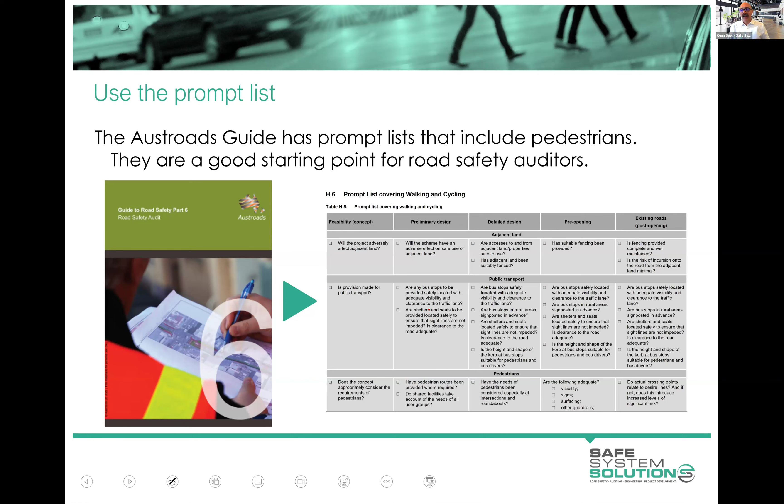On that point, I better start ending our session here. But I do want to highlight to everybody that Austroads does produce these things in the back of the Austroads Guide to Road Safety Part 6 that are what we call prompt lists. Now, they are not like checklists. You don't just go through these and your audit's done. No, they're just there to prompt your thinking. And there's one on walking and cycling, and it has lots of questions. So that's going to help you as you start auditing to think about lots and lots of issues that could present risk for our road users. So I'll be encouraging you to grab that out of the learning management system and have a look at it as we tick on.